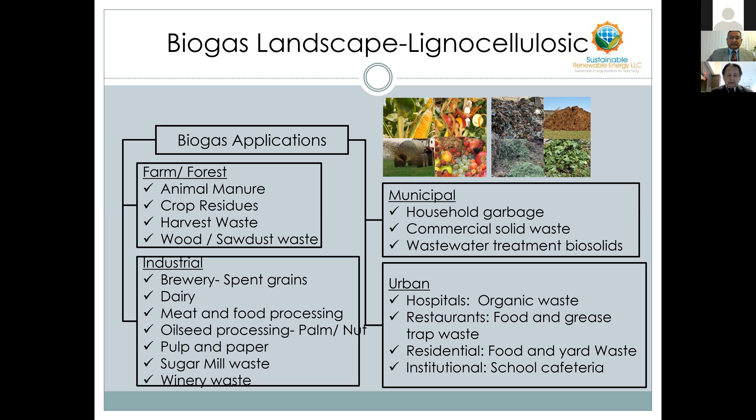In municipal waste, we can take household garbage, commercial solid waste, and wastewater biosolids, where we have some plants operating in Germany. In urban waste, we can take food waste from hospitals, restaurants, residential and institutional waste.

I'm pretty sure you all have an idea of how anaerobic digesters work, but I'll give you an overview. The organic waste biomass goes into anaerobic digesters. In the current option, which we have chosen, the biogas is purified into renewable natural gas.

There's a lot of chatter about hydrogen, and the government intends to put up to 5 to 10% of hydrogen into the pipelines now. That is our future option. We can take this renewable natural gas and reform it into green hydrogen, which is a future option we are looking at.

So RNG remains our main revenue stream. The RNG revenues come from three sources: first is the pipeline gate prices, which is around $2 to $2.50 per MMBTU; the RIN credits, currently around $1.62 to $1.65; and the LCFS credits in California. RNG is approximately 70 to 80% of our revenue stream.

The second revenue stream we're looking at, which we haven't explored fully as yet, is carbon dioxide. Carbon dioxide has huge market opportunities now. One of the biggest opportunities is in shale gas, to pump carbon dioxide into shale gas wells.

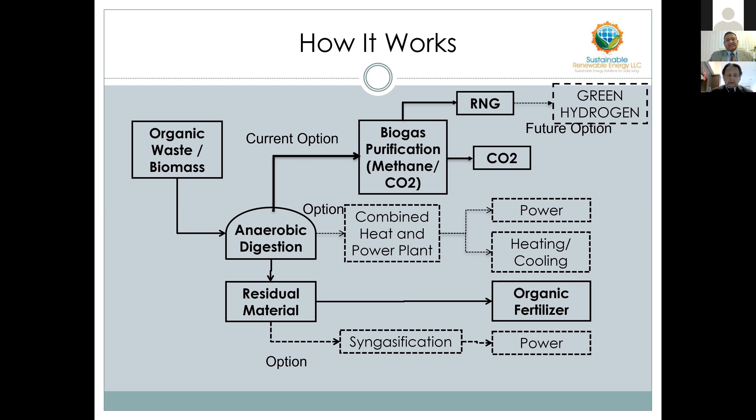So let's go back and answer the first question: why invest in SRE? What does the executive team at SRE have to offer? We have deep experience in the renewable energy sector and a team set up to deliver projects. Our team has a combined 120 years of experience in renewable energy, and I'll explain who our team members are.

So I have an advisory board. Mr. NC Vasuki is our advisory board member. NC needs no introduction. He was a former president of SWANA, and has over 40 years of experience in solid waste management. He led for the last 20 years as CEO of the largest solid waste management company in North America, the state of Delaware.

Also with us on our advisory board is Dr. KRS Murthy. Dr. Murthy is a former professor of electronics in the University of California system. He was instrumental in setting up the UC Pomona campus, and he's a serial investor. Dr. Murthy was also a CEO of a solar company before he sold it off.

Pinakin Patel comes with me from Fuel Cell Energy. He was director of special systems at Fuel Cell, and he was instrumental in getting around $300 million in government funding there. He recently retired and started his own company, TMG Group, in Danbury, Connecticut.

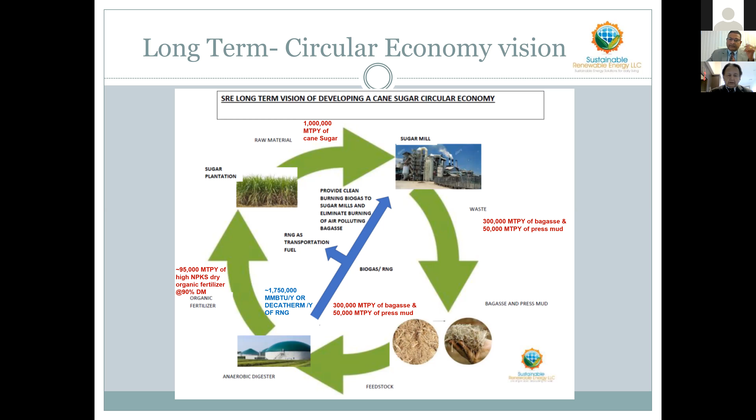So let's talk about, if you don't mind, we'll take a real quick question. Sure.

What materials are used in the anaerobic digester tanks? There's 3 questions, actually, 4. What size are those tanks, and who are the primary fabricators of those tanks?

Sounds like somebody who knows what they're talking about, or pretending to know.

That wasn't meant to be harsh, but our digester design is very different. It's a tank-in-tank design. One of the reasons our technology is unique is because we don't have any agitators, and we don't actually need any agitators in our tanks. So our design is very different, and because we don't need agitators, we are not restricted.

Our tank size is not restricted by the size of the largest impeller available in the market. So we can design our tanks to any shape and size that we want. That's kind of unique, if you're in the AD business, that's something you'll be scratching your head on, because a lot of these generation 1 technologies have a restriction on the size of the tanks by means of the largest size of impellers they can get in the market.

And now our tanks, as a result, are huge, and they are site fabricated. We buy sheets and they'll be fabricated at site. Does that answer the question?

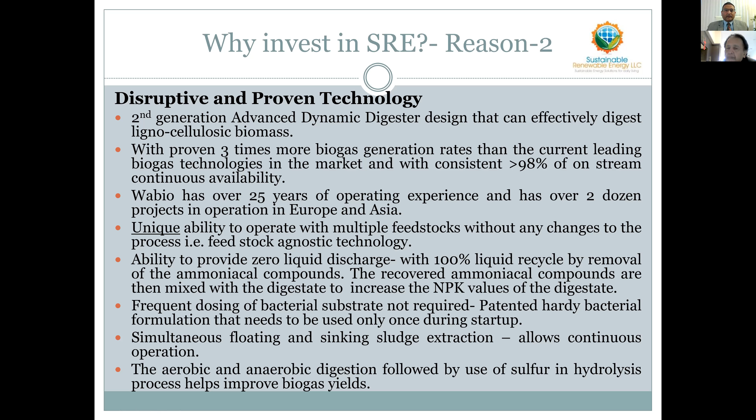A lot of questions have come to me: has Wabio done anything in bagasse, and how do you know you can digest bagasse? This is the next slide.

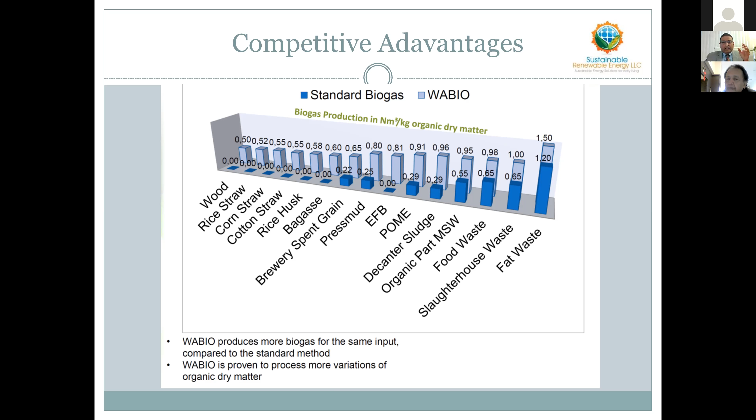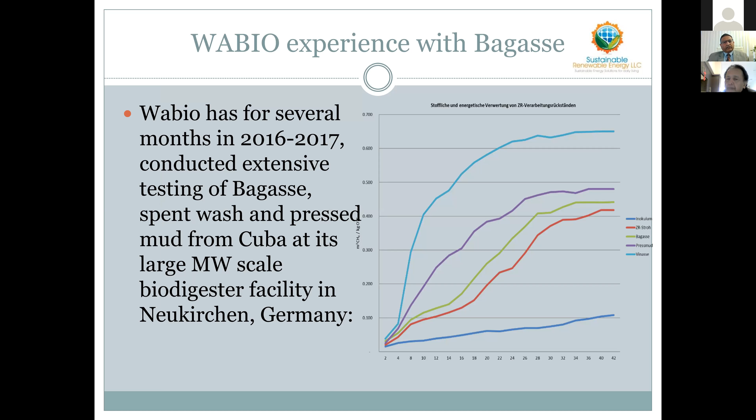In 2016 and 17, the Cuban government approached KfW/DEG, an investment company. As you know, Cuba is the 5th or 6th largest sugarcane producer in the world, and they have a huge problem with bagasse, which they call Marabu hardwood. They approached KfW/DEG to find a solution.

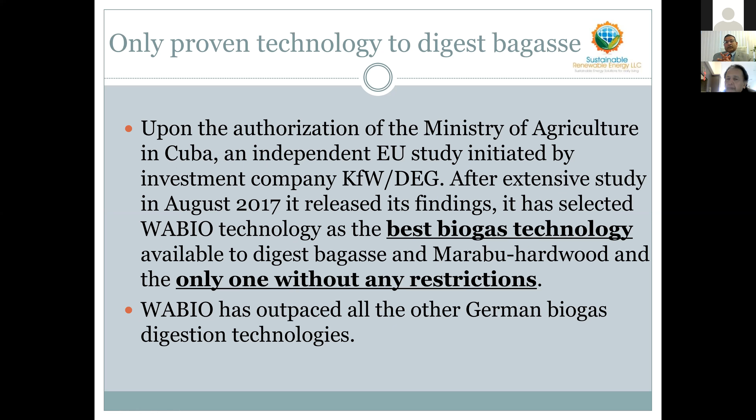KfW/DEG went to HPC AG, one of the leading engineering enterprises in the environmental sector. In 2016, HPC AG was entrusted with a 1-year allocation to provide a comprehensive evaluation of state-of-art technologies in the EU to determine the best available anaerobic digestion technology for bagasse and Marabu hardwood. After a 1-year study, they reported that the best biogas technology available to digest bagasse and Marabu hardwood is Wabio Technology, the only one without any restrictions.

This 600-page report was co-authored by Dr. Christoph Oak at HPC and Thomas Wittstand, and was released in August 2017, outlining the best available technologies for digesting bagasse and hardwood. They have a whole section on Wabio Technology from page 412 to 440.

As far as technology applications are concerned, we can digest any organic substrates with a high lignocellulosic component: brewery waste, distilleries, grain house, pulp and paper mills, starch factories, sugarcane bagasse, grain husk, peanut hulls, and other nut hulls. We can also handle organic waste from previous chemical treatments including cellulose production, paper processing waste, beer production, bioethanol production, oil extraction, potato food, vegetable processing, and canning.

One unique feature of our technology is that because we can remove the ammoniacal compounds, we can also process high urea concentration wastes like poultry manure and turkey litter, which very few biogas companies will ever venture into. Those are our applications, and these are the advantages of our technology.

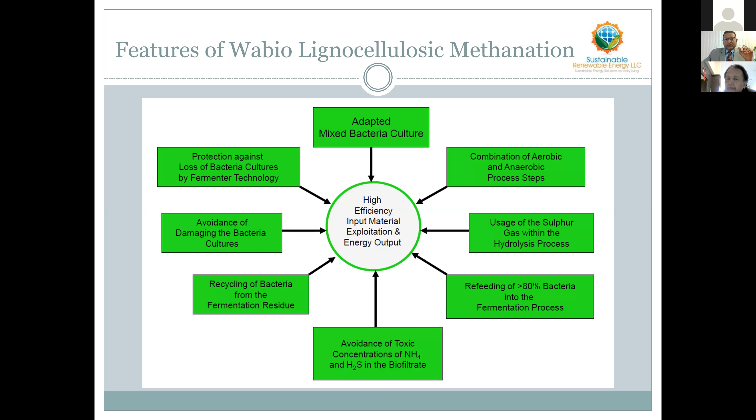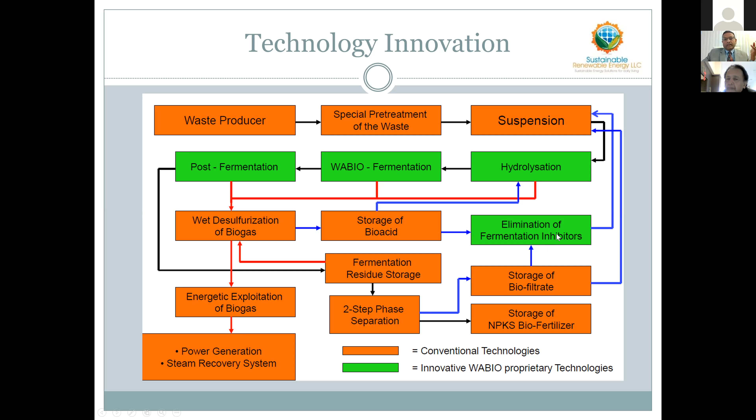Wabio's value-added technology relates to post-fermentation, fermentation, hydrolyzation, and the elimination of fermentation inhibitors, or ammoniacal compound removal. That's really where our forte is, and that's why we are where we are. So I'm going to outline it - this is our 26-year-old history about Wabio.

These are some of our old projects still in operation. Roding was our first project in 1996, at 150 kilowatt electrical. Bad Köstritz is still in operation, completed in December 2006 - it's 14 years now and still running.

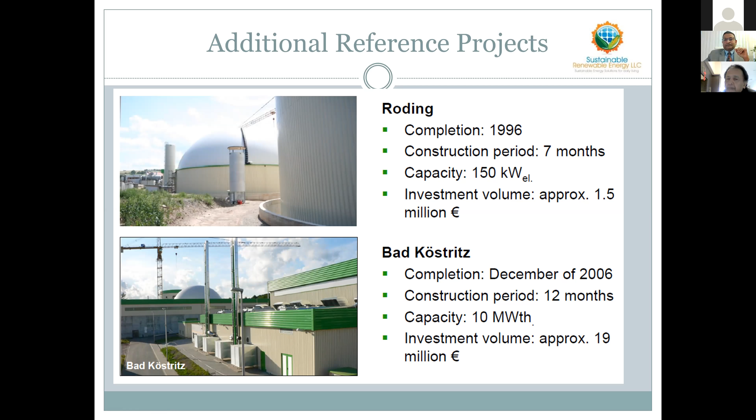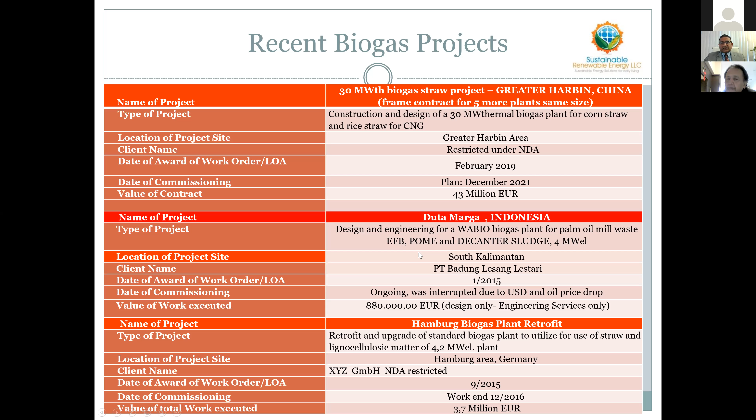These are some of the projects Wabio has executed. Some recent projects include a 30 megawatt biogas straw project in Greater Harbin, China, currently in the construction phase, and Wabio has signed 5 more projects of the same size. Similarly, after the success of our projects in Indonesia with palm oil and empty fruit bunches from palm mill waste, we have since signed 5 more projects in Indonesia with this technology.

Sanjay, can I just interrupt for a moment? Just being mindful of time, and I know you're going to get to it, but do you think we could just talk about the economics of the investment?

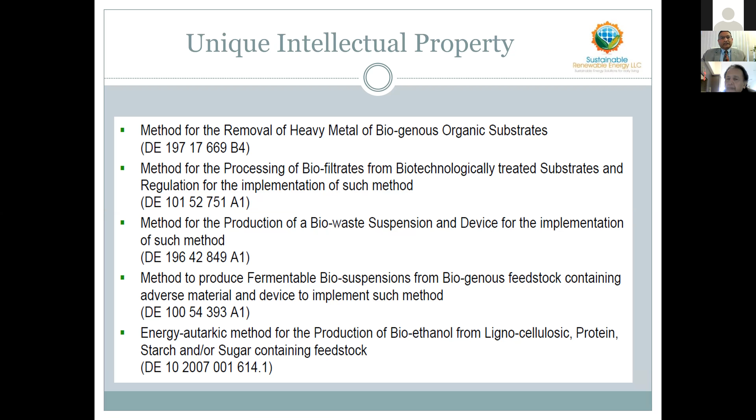Sure, yeah, good - I was just about to finish that. And this is our intellectual property.

Let's deep dive into the economics of the project. This is a highly profitable shovel-ready project. We have independent third-party valuations on our cash flow. We have an LOI from the sugar mill for land and feedstock supply. We're awaiting an LOI this week from an RNG offtaker, and a local fertilizer manufacturer has approached us and is willing to give us an LOI, which I'm expecting any minute.

We took great pains to identify what we call low-hanging fruit to choose this particular project. After careful consideration, we chose Louisiana as the location because of its huge availability of biomass. The lower half of Louisiana is bayou country with a lot of sugar mills in that region. The upper part of Louisiana is rice country - Louisiana is the 4th or 5th largest rice producer in North America. So you have a huge amount of biomass in that region, and the sugar industry is hurting with the huge pileup of bagasse at site.

At this particular sugar mill, there's over 1.5 million tons of bagasse on site. Louisiana is in a tropical climate zone, which is conducive to AD technology, and it has an industry that is in dire need of a solution. The bagasse also presents us with methane offsets, which helps us get a low CI score, and I'll explain that as we go on.

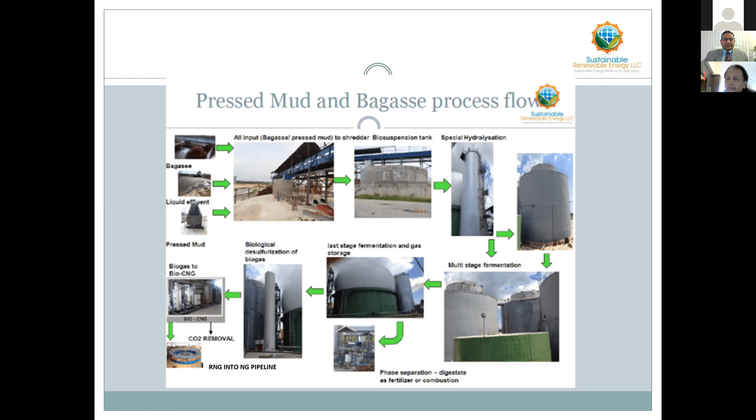So this is the process, and this is how our layout will look like.

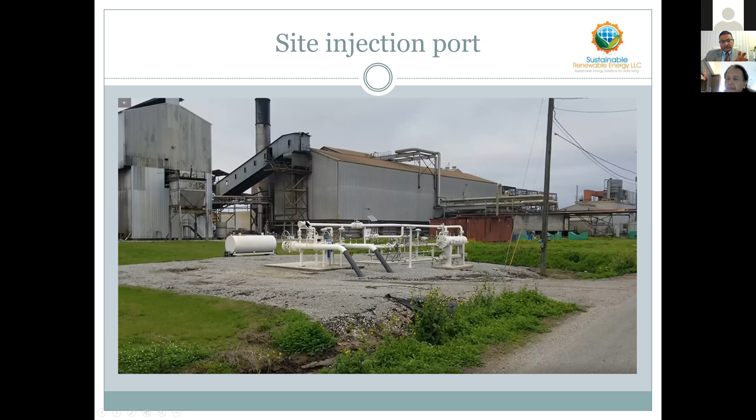Typically what happens is we give Wabio the waste and some analysis of the waste. Based on the analysis of the waste, Wabio develops a generation sheet and provides it to us.

Somebody asked me a question, what is the biogas volume? Our total combined tank volume for biogas will be 21.375 million cubic meters. Our tank size will be 36,693 cubic meters. There'll be multiple tanks, but the total volume in those tanks will add up to 36,693 cubic meters.

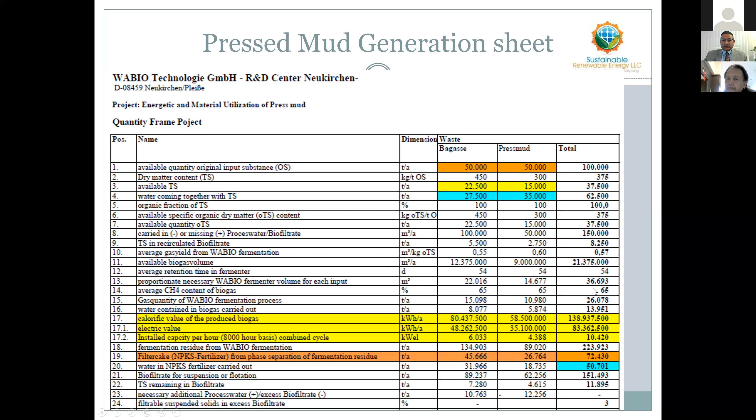Today's prices are $1.60. We had to take an average because this is a few years old. The LCFS prices were calculated at $120 per metric ton of carbon dioxide equivalent, and the LCFS revenues are around 5.56 million.

We have assumed a fertilizer price of $10 per metric ton dry matter, and we have 2.5 million from that. We have not assumed any revenues from the sale of carbon dioxide as yet.

So I wanted to look at this. Total revenue is around $13.1 million.

In arriving at these numbers, our biogas yield is 756 million standard cubic feet a year. The biogas is a mix of carbon dioxide and methane. The methane portion, or renewable natural gas portion, is 491 million SCF per year, which commensurates to approximately 5.275 million RINs per year.

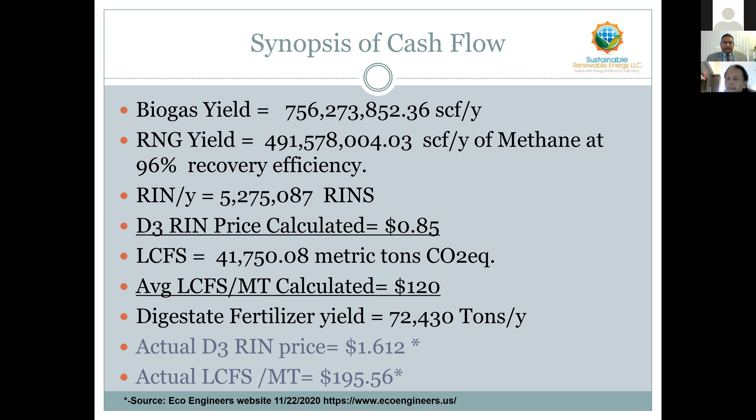Now, this is an extremely conservative calculation. The current prices of the D3 RIN are at 1.612, while the LCFS is at 195.56 as of the recent prices. So in arriving at these cash flows, we have not assumed any government grants or credits. We have only taken 5-year MACRS depreciation.

No production tax credits or investment tax credits have been assumed. No value has been assigned to the carbon dioxide. The tax rate has been assumed to be 35%, and the borrowing rate is assumed to be 8.5%. No value has been assigned to waste heat.

We generate a significant amount of waste heat from the 4% of biogas that we don't recover. We have assumed 24/7 plant operations and 14 full-time employees. The plant location meets NMTC program criteria and opportunity zone designation. No benefits have been assumed.

The waste heat from this RNG oxidizer of the unrecoverable biogas has to be burnt. We cannot just release it into the environment. So there is waste heat of 2.34 decatherms, or 2.34 MMBTUs per hour, from waste heat which can be recovered and used for HVAC or other uses.

We generate 72,430 tons per year of high NPK fertilizer at 35% dry matter, sold at $10 a dry ton. You can see an additional revenue of 2.56 million. We also generate around 15,000 metric tons per year of carbon dioxide, or more.

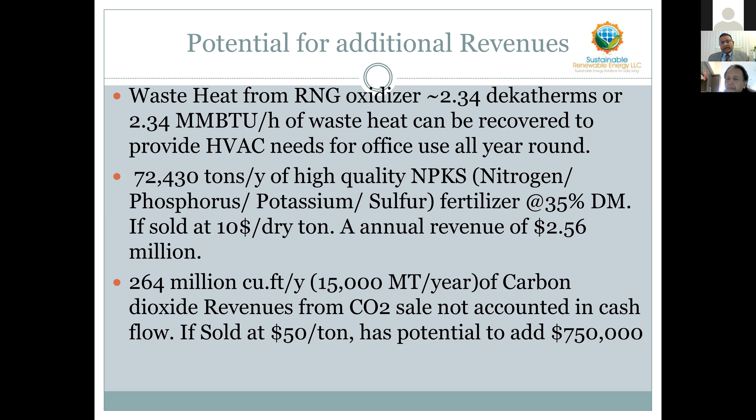If we sell this carbon dioxide, we can earn sequestration credits of $40 immediately. Currently we have scouted the market, and the sale price of carbon dioxide is $50 per ton. So this has the potential to add around $750,000 to our revenue.

The project IRR was 23.6%. Now it is 41.3% based on current market projections, and the payback is 2.3 years. In this case, the payback is 3.8 years.

In addition, in the LCFS market, besides the LCFS price, which is currently at $195, there is also an LCFS score that one has to take into account. For the LCFS score, based on our prior discussions with some investors who had asked for independent third-party opinions, we approached two agencies for that.

One was Clean Energy Consultant. These are former eco-engineer personnel, and they did a comprehensive evaluation from the GREET model perspective. They came up with a baseline CI score of minus 110. Now, we have taken a CI score of minus 22.

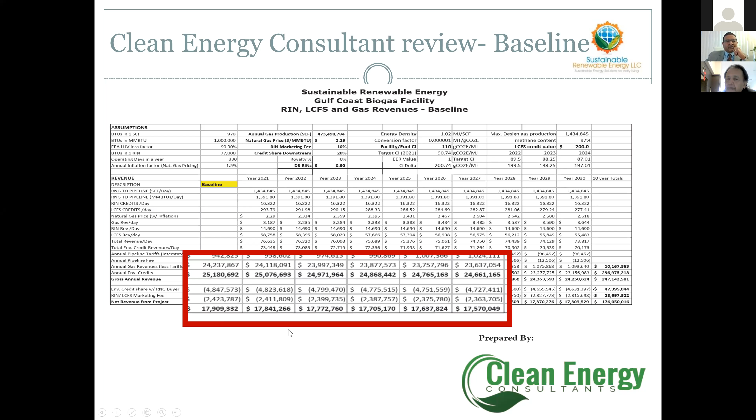But they also feel that the highest we could potentially look at is a CI score of minus 200. So they have given us a range between minus 110 to minus 200, and at that point the revenue shoots up to $26.256 million.

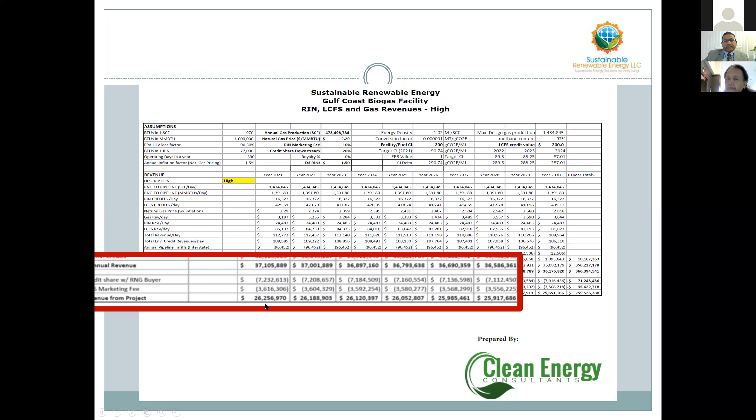The Clean Energy Consultant had provided us that we should be expecting a CI score between minus 110 to minus 200. So we also took an independent evaluation from Mr. Brent Riffle at SCS Consulting. Brent Riffle was one of the personnel instrumental in developing the GREET model with CARB, and he looked at it.

We went through a series of questions based on the GREET model and methane estimation methods, and he is of the opinion that initially CARB will assign a number for us based on the avoided landfilling, based on a tier 1 LCFS calculator tool, and he expects that to be in the ballpark of minus 50.86. After 5 to 6 months of continuous operation, CARB looks at this again, and we can expect a score of minus 168.93 based on his estimates.

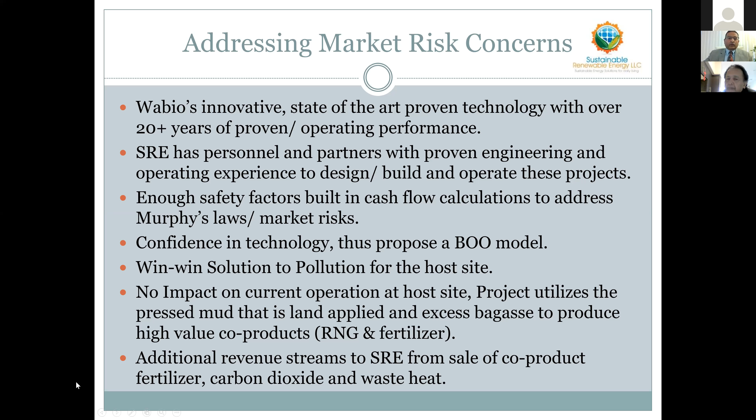So from the safety factor perspective, let's recap. We have calculated our cash flow at 0.85. The D3 RIN actual price today is 1.612. The LCFS is 51,237; our off-taker thinks our LCFS should be 57,000, but that's a different matter. The price of LCFS credit value we have assumed is 120; today's market cost is 195. The LCFS score we assumed is minus 22.71; third-party estimates of the LCFS score are minus 150 to 200.

So this project is a $30 million CAPEX. We have 4 private investors that have approached us for $20 million in debt through senior secured debt. We're looking for capital of $10 million, but we're open if somebody is willing to give us $30 million also. Construction is 10 months after permits. Typically in Louisiana, it's 45 to 60 days for permits. Startup date will be 12 months from receipt of funding. That's our project implementation schedule.

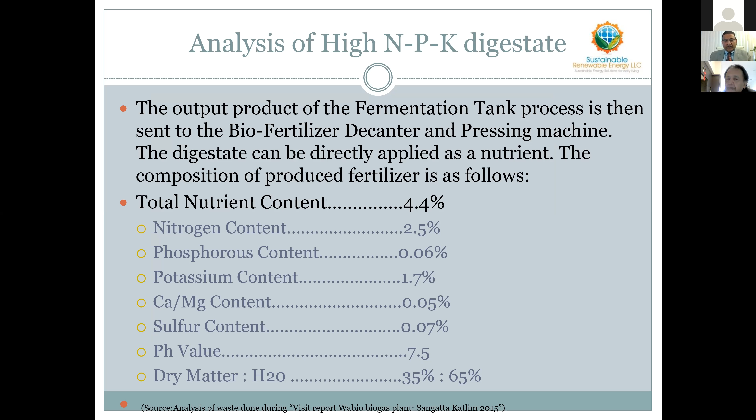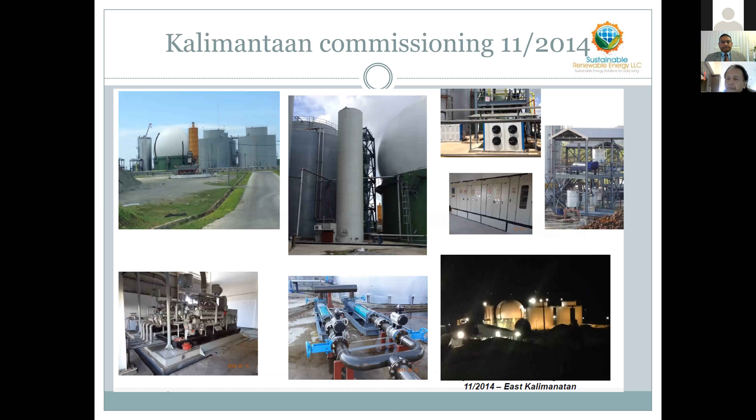And this is a third-party analysis of our digestate in Indonesia, and these are some of our project photographs from the site. Any questions, gentlemen?

Yeah, we have one here. Are any of the Louisiana sugar producers investors? No, we haven't approached them to be investors. They have their hands full with their own issues.

So we are not. One would argue that the sugar producer whose land you're building it on is an investor in kind, right? He's giving me 10 acres of land at $1 per year fee. What more do you want? Plus, he's giving me $3 a metric ton for the bagasse. That itself speaks of his commitment to the project. Yeah, and we haven't honestly approached them. Yeah, that's a fair answer. Okay, so we answered that. Great, well done, Sanjay.

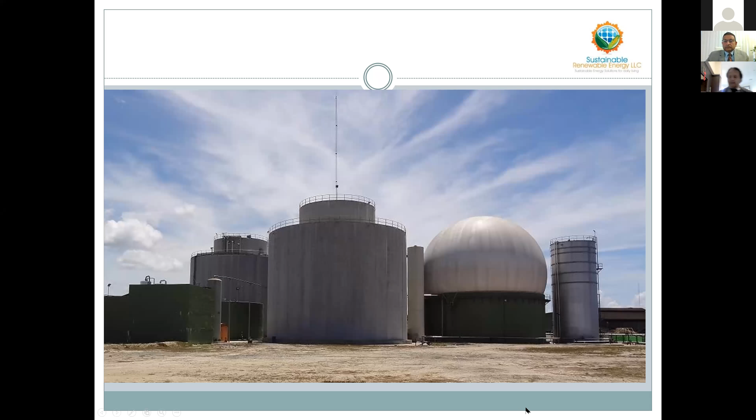What's important here is that we can take up any kind of biomass waste, number one. We're looking at sugar industry waste in this particular project example presented, but we can talk about other ones as needed. This is the first one ready to go. Number two, remember this metric: 2.5 times the efficiency of any other biomass-to-waste-to-energy technology.

That itself is where we excel, 2.5 times. And we have full lock on the technology, and no one else has it, so no one else can come in. We have the exclusive license within USA and other countries. That's a very important distinction of what we have.

We have a team that's been in the waste-to-energy and other energy industries, as Mr. Sanjay Parab himself, with decades of experience, and everyone has 3 to 4 to 5 decades in the industry as well. So it's the economics, the team, and the industry itself we've picked up for this presentation on sugar cane industry waste, making sure proximity is there for the pipeline.

That's where our cost is minimized, as Mr. Sanjay Parab very clearly mentioned. We get land for the whole project time, approximately, inside their campus. There's already existing waste sitting there that we can start with, we don't have to wait for more waste to come. We have enough waste that's accumulated, so they're desperate to do something, and we can take it up and continue adding more waste from the factory there.